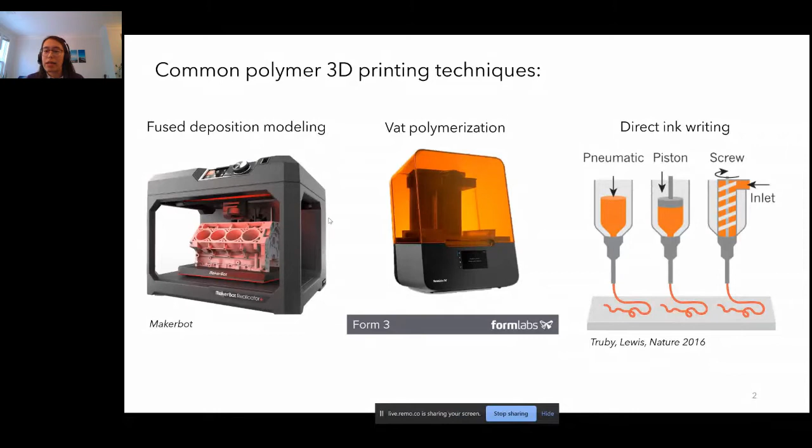So fused deposition modeling, or FDM, is a nice technique for consumers but it is limited to thermoplastics. So the polymer space can be split into thermoplastics, where you can heat them up and cool them down and still maintain the same properties. So things like ABS, PLA, polycarbonate, those are thermoplastics. The other segment of polymers is thermosets. So those have irreversible bonds. You cannot heat those up and cool them down and reform them. So things like epoxies and polyurethanes and silicones.

So the way that fused deposition modeling works is you have this polymer filament that has to be a thermoplastic because you're feeding it through a heated nozzle to make it formable, and then you write out the continuous filament onto a substrate and build up your part layer by layer. So because it's limited to thermoplastics, we need other techniques to fill out that material space and make thermosets printable.

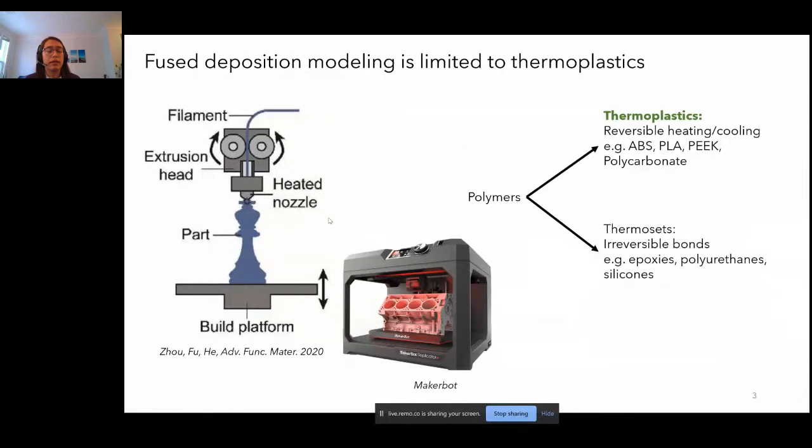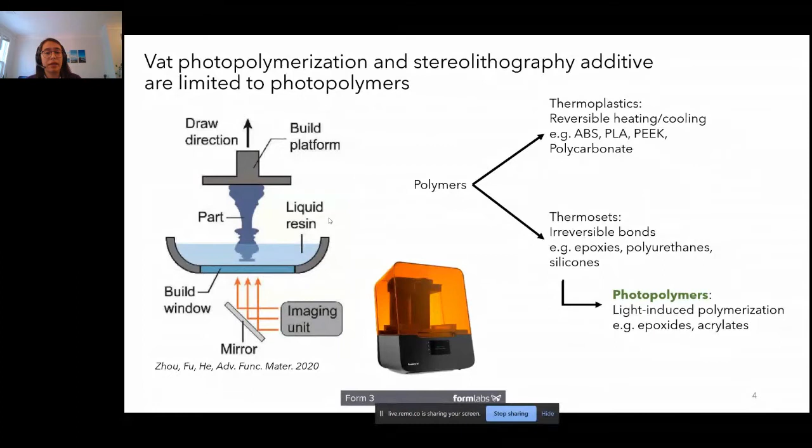So one of the ways you can print those is using vat photopolymerization or stereolithography additive manufacturing. So the way this works is you have a vat that is full of a photopolymer resin. So that means that when you shine a light on it of a certain wavelength, that'll cure it and turn it into a solid. So you submerge your stage into that bath and write out your part layer by layer again. So that takes care of photopolymers, things like epoxides and acrylates, which are a subset of thermosets. But we're still missing a lot of the thermoset space, so we need another technique, which is direct ink writing.

So the way that direct ink writing works is you have a reservoir that's full of your ink, and you extrude it through a nozzle and write out continuous filaments onto a substrate. And you can use a variety of extrusion methods. You could use pneumatic extrusion, so you have an air pressure that is pushing this fluid out of the nozzle. You could use a piston, you could use a screw. And then there are a variety of curing techniques. So once your part is written out onto the substrate, you can cure it using a variety of techniques.

If it's something like alginate, then you could submerge your part into a calcium bath for ionic cross-linking. If you have certain biopolymers, then you could use enzymatic cross-linking to turn that part into a solid. You could, again, use UV radiation. So all these photopolymers are then going to be printable using direct ink writing. And then there's thermal curing. So if you have something like an epoxy, you could write out your part and then heat it up to cure it.

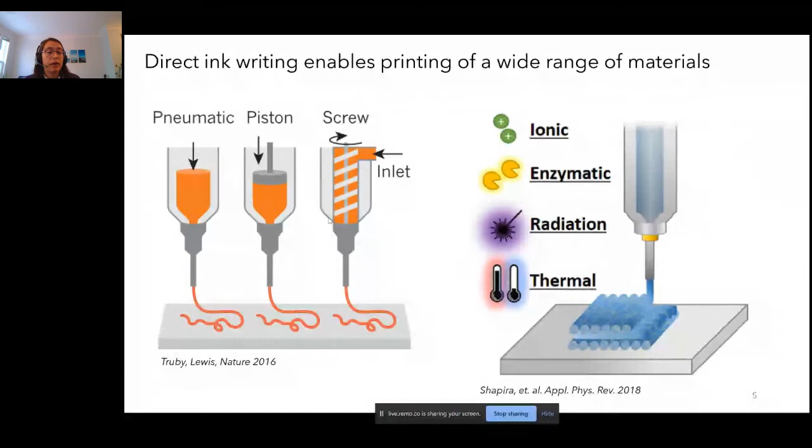So because you have this big range of curing techniques that are available to you, direct ink writing really opens up the material space to include a lot of those thermosets, as well as some other types of materials. You can print ceramic slurries and ceramic matrix composites using this technique because you have that variety of curing techniques. So people have been able to print things like rubber, ceramic matrix composites, polymer matrix composites, and hydrogels using direct ink writing.

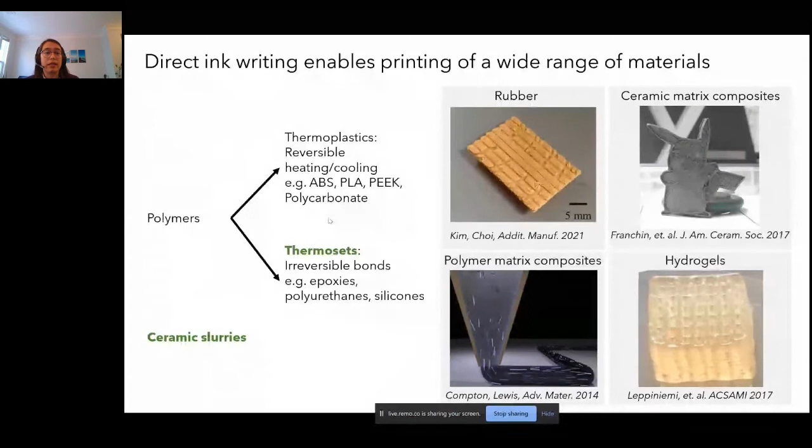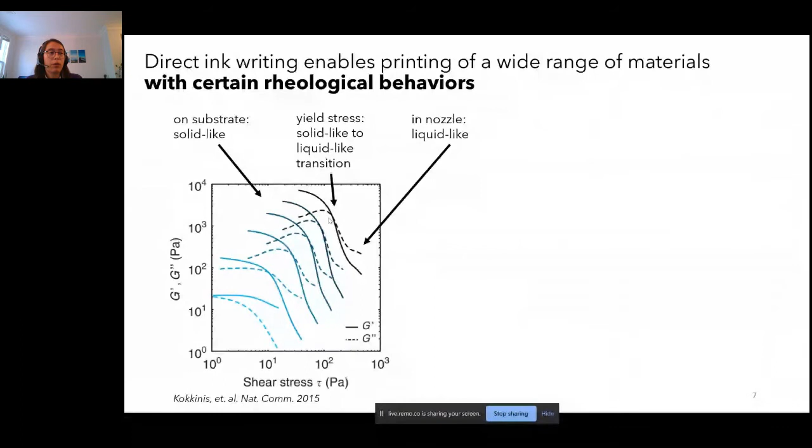Inside of the nozzle, we're going to be at high shear stresses, and you can see that G double prime is greater than G prime, so this material is going to behave like a liquid. And then in between that solid-like to liquid-like transition, there is a yield stress. So that's the stress at which this material stops behaving like an elastic solid, starts to behave like a liquid. So that yield stress needs to be high enough that the material won't just collapse under its own weight. It won't just flow onto the substrate if you bump the stage or move the stage around.

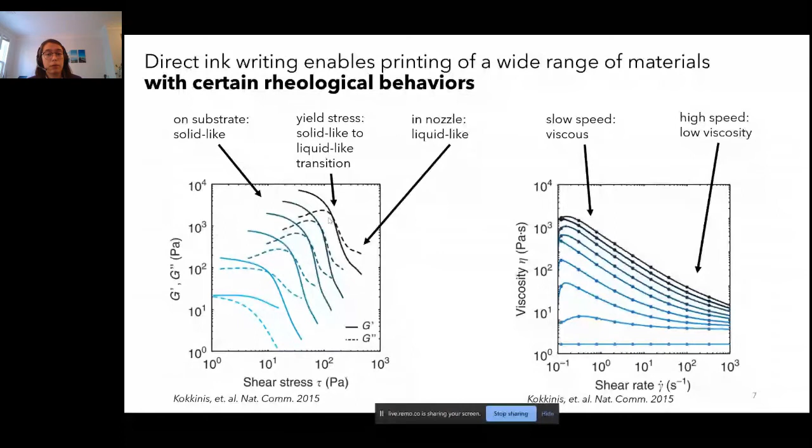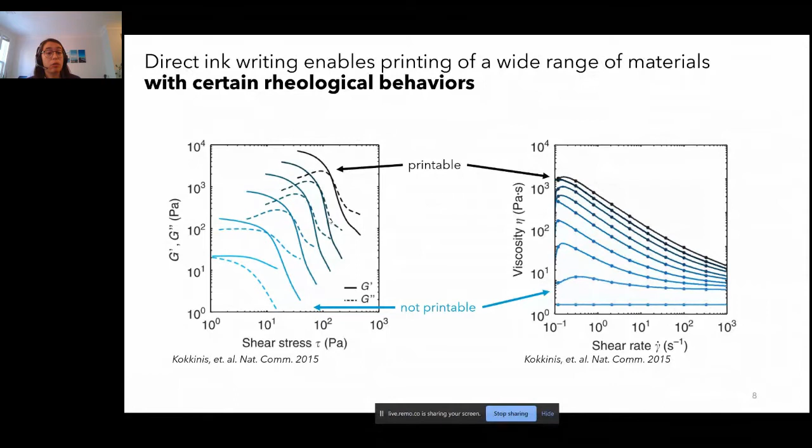So among these inks that are plotted here, at the top of the plot where we have these dark lines, those inks are going to be printable because they have a high enough yield stress that they will not just collapse under their own weight. However, at the low end of this plot, and these light blue inks, these are not viscous enough, they're not shear thinning enough, they don't have a high enough yield stress to be printable using direct ink writing. So that's where embedded 3D printing really becomes useful.

So the way that this works is you have a print bath that is full of a support fluid. Usually that fluid will have a yield stress and it'll be shear thinning just like those materials that I talked about in the last slide. So things like carbopol hydrogels or laponite hydrogels. Those will be good support baths. So you embed your nozzle into that bath and then write out continuous filaments for embedded direct ink writing, or you could print out droplets for embedded droplet printing.

So because these materials have a yield stress, they'll behave like a liquid when the nozzle is moving through them, and that'll allow the nozzles to move. But they'll behave like a solid after the nozzle has left, so they'll hold the form of whatever you printed. So this means that we can expand the available material space into low viscosity materials, and we can print thin-walled structures and delicate structures because we don't have to worry as much about the properties of the ink when you have that extra support available to you.

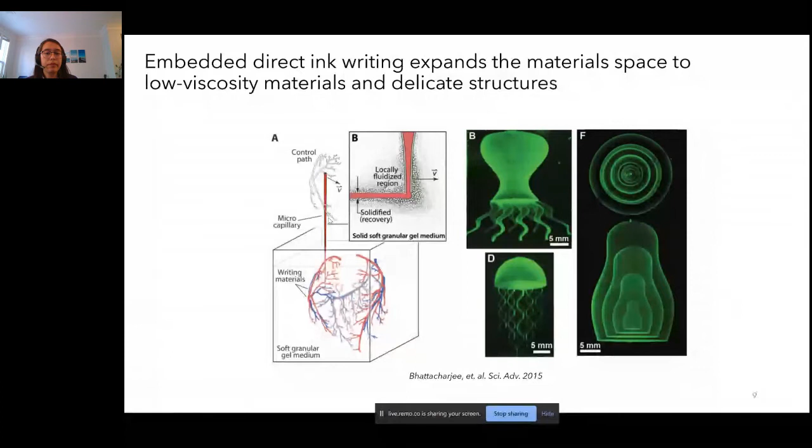So after you're done printing, you can remove these parts from the bath either by scooping them out or using dissolution in a buffer. So what this means is those blue inks, those low viscosity inks, are now going to be printable as long as we use a support bath.

So people have been able to print a wide variety of materials using this technique before, and it's been particularly useful for bioprinting. So you might have seen this paper a couple of years ago where they printed a heart, which actually included human heart cells, as well as some extracellular matrix. So you can print these cellularized constructs and actually use the bath to support the growth of that construct by introducing nutrients that'll feed the cells and allow the cells to proliferate.

People have also been able to print cell-only inks. So instead of having all these biopolymers available that'll scaffold the ink, they can print just cells, and those cells have been able to grow and develop tissues. And then you can also print functional materials. So things like electrically conductive hydrogels, things that are at a low viscosity, where you've already tailored your ink to a certain functional property like electrical conductivity. You can still print that ink by using a support bath because that support bath takes care of the rheology aspect.

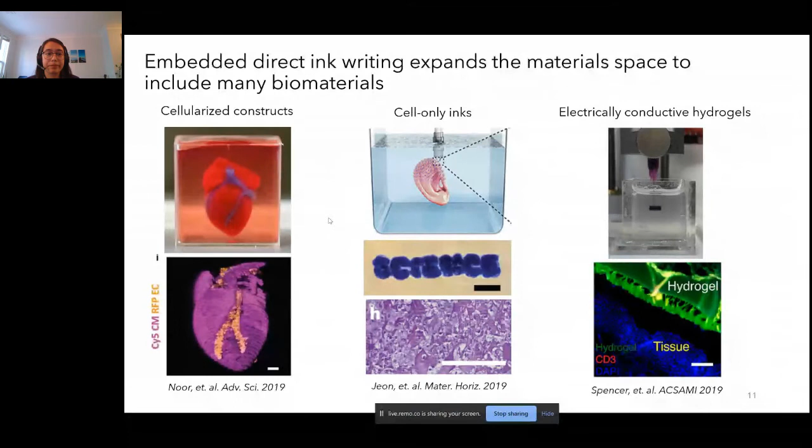So what I want to talk about in this talk is how you choose a support bath for embedded 3D printing. Usually you already have an ink in mind that is going to support your cells or serve some functional purpose. And so how do you choose a bath that is appropriate for that ink? And there are two considerations that you need to take into account. There's rheology and there's surface tension.

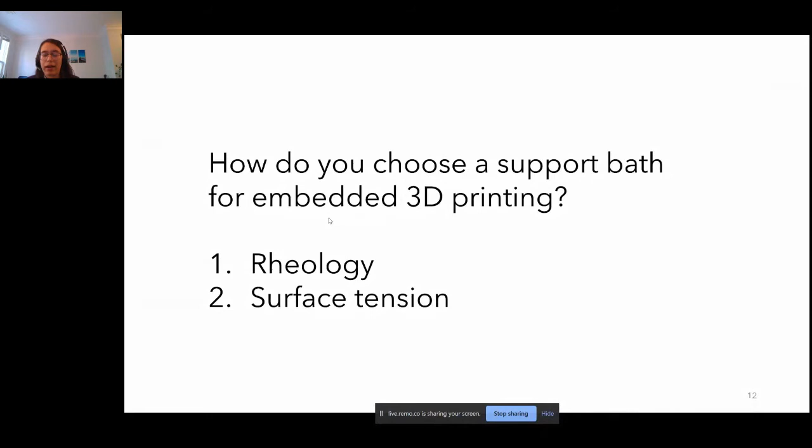So in this talk, I'm going to talk about model materials, which are relevant to bioprinting, but have certain rheological properties that are going to tell us about how the rheology is important. So I'm going to talk about how defects can occur in individual filaments in embedded 3D printing. So this is a simulated filament. You can see that blue column is the ink that's inside of the nozzle, and you have a filament that's coming out of the nozzle.

If you look at the cross section of that filament, it's not circular like the nozzle is. It actually has a sort of fin shape, so it narrows towards the top and towards a point. So I'm going to express that cross section in terms of the aspect ratio, the height over width. I'm also going to look at the length of these filaments. So if I ask the printer for a 10 millimeter filament, I want a 10 millimeter filament.

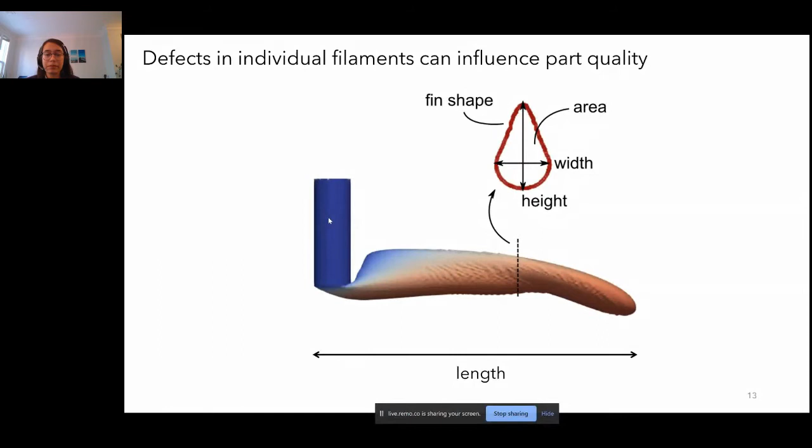Oftentimes, if there are defects, these filaments will end up a little shorter than you intended them to be, and that's going to cause a lot of problems in terms of the shape fidelity of the part. So we're looking for a length that's exactly as long as we asked for. We used two methods to identify these sources of defects. We used simulations and experiments.

So these simulations were done in OpenFOAM, which is a computational fluid dynamics solver. So we imposed a pressure of ink onto a static nozzle, and then had a moving bath moving past it, and so that would extrude a single filament. We also used in situ imaging experiments. So again, we have a static nozzle and a moving bath, but this time we have a camera looking at the tip of the nozzle so that we can see what's happening as we're printing.

And then once the print is over, we can remove the nozzle and go back and take images of our print. So for these experiments, we printed straight lines where we looked at the lines head-on to identify their cross-sectional shape and printed them out from the side to look at their lengths. So first, let's talk about how rheology influences filament defects. In this section, we're going to have no surface tension, and our ink speeds will be set equal to the stage speeds.

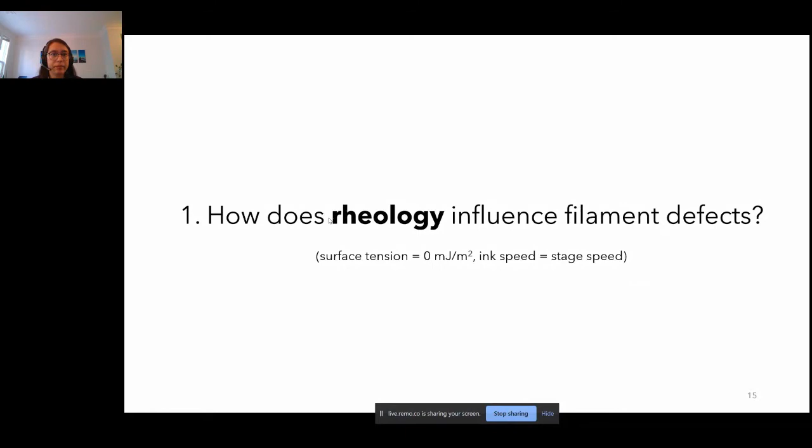So I'm going to investigate a variety of different rheological behaviors. So one type of material that has been printed is the Newtonian material. So usually in these papers where they're using Newtonian materials, they'll have some sort of stabilizer at the interface. So they'll be printing oil into water, but they'll have a particle that stabilizes the interface so that the material doesn't break up into droplets.

In our simulation, we use Newtonian fluids in order to identify what is the effect of viscous dissipation on this process. We don't want to have to worry about yielding or elasticity or anything else, just viscous dissipation. We also simulated Herschel-Bulkley fluids. So these are the fluids that are like the fluids that I talked about in the beginning, where they're going to behave like a solid up until a yield stress, at which point they're going to behave like a shear thinning liquid.

So for these simulated fluids, all of the behavior in the shear thinning region is going to be the same. These are all going to have the same viscosity above yield. But below yield, they have different viscosities, which I call the plateau viscosity. So that is going to extract just the effect of what the unyielded properties of the materials do to the structure of the filament.

And then finally, for our experimental fluids, we're going to look at a variety of fluids, but generally they follow the same pattern, where they're shear thinning, but as you increase the amount of rheological modifier in that material, you're going to shift this entire shear thinning curve upwards, so increase its viscosity. So what I'm showing you here is laponite and water. So laponite is a layered silicate, and it'll form these structures that will give it a yield stress and give it shear thinning properties.

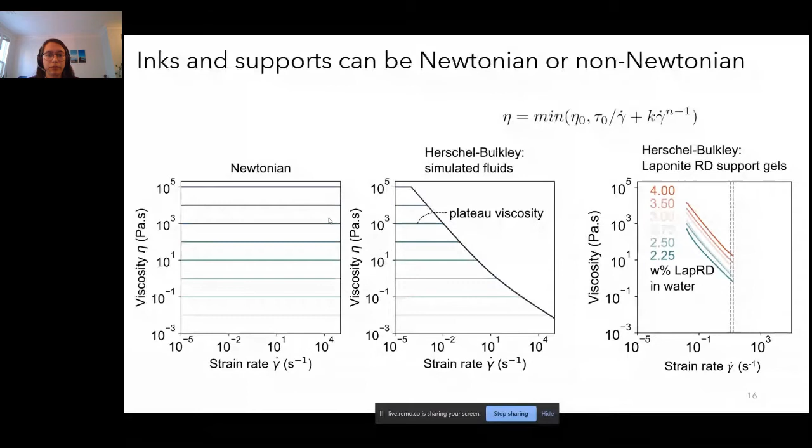We're also going to be looking at a circular shape because if there's any sort of sharp edges on these filaments, that could lead to porosity in the final part, or it could lead to surface roughness, both of which would be problematic. So for these Newtonian fluids, remember this viscosity is going to be constant with strain rate.

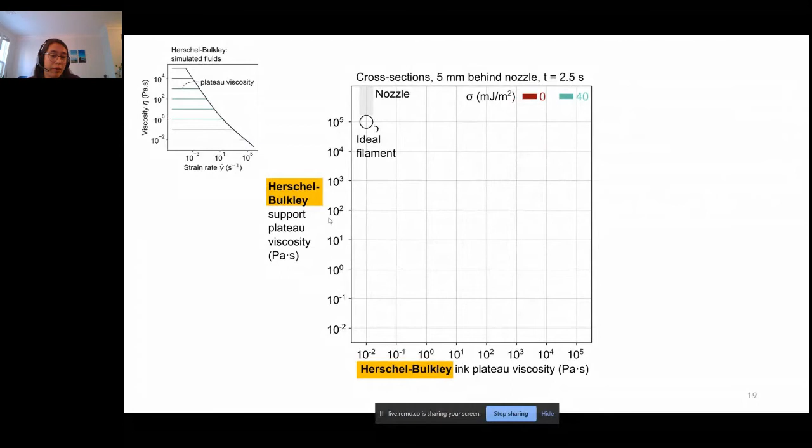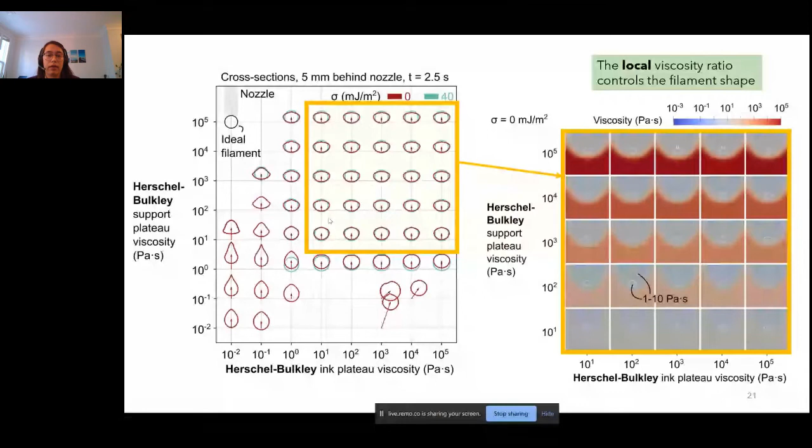So now let's look at our experimental fluids. So here, our local viscosities are going to change, and they're going to increase as we increase the concentration of Laponite in the material. So here we're printing Laponite water into Laponite water, but our ink has a little bit of dye, so we can see contrast.

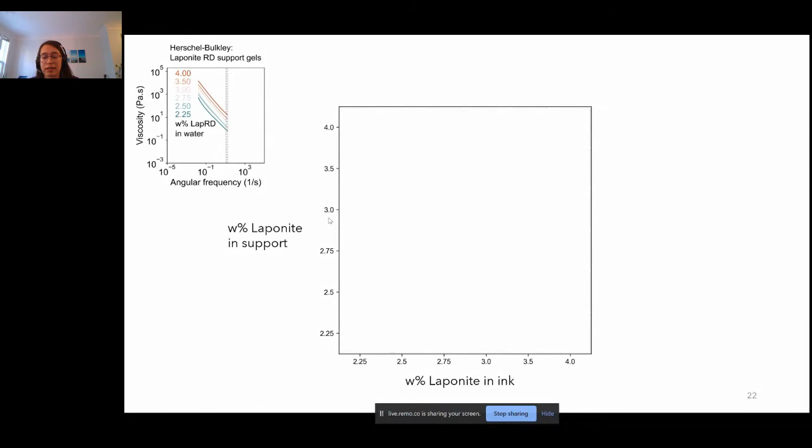So if you look at the bottom right corner of this plot, you can see that as we go to high ink viscosities and low support viscosities, we get circular filaments. If we go towards the top left corner of this plot, where we have low ink viscosities and high support viscosities, we get very tall and narrow filaments. And these filaments also get sort of sharp edges at the top and at the bottom of the sides.

So in order to compare this to the simulations, remember the simulations taught us that the local viscosity ratio controls the filament shape. So let's identify the local viscosity ratio. You can get that by taking your print speeds, so the speed of ink moving through the nozzle and the speed of the stage moving underneath the nozzle. Divide that by the dimensions of the nozzle, and that'll give you your shear rate. Plug that in, you can get your local viscosity.

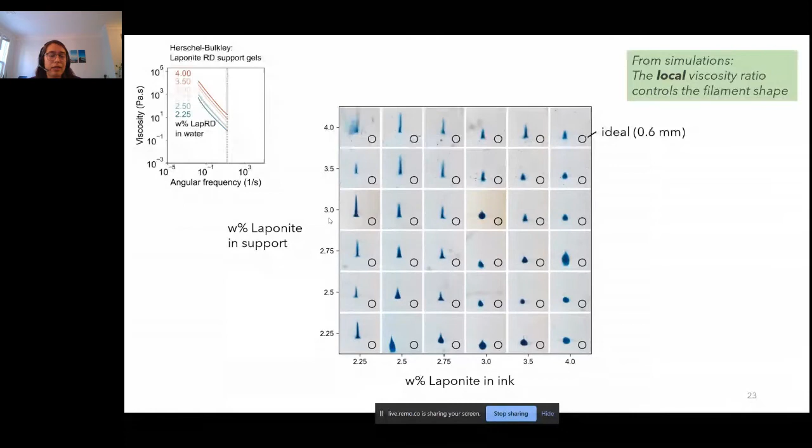So in the top left corner, you can see those dotted lines. Those are our local shear rates. So that's how we get our local viscosity. So here, what you can see is that as you increase your viscosity ratio, you decrease the cross-section height over width. That occurs in both our simulations and our experiments. And there's pretty good agreement as we go to higher viscosity ratios.

So what this tells us is that if the support is more viscous than the ink, it just ends up squeezing the filament vertically and creating these very tall and narrow aspect ratios. Another thing that we can note here is that you need to go to a viscosity ratio of greater than 1 in order to get a circular cross-section. So the ink needs to be a little bit more viscous than the support to get to this ideal circle.

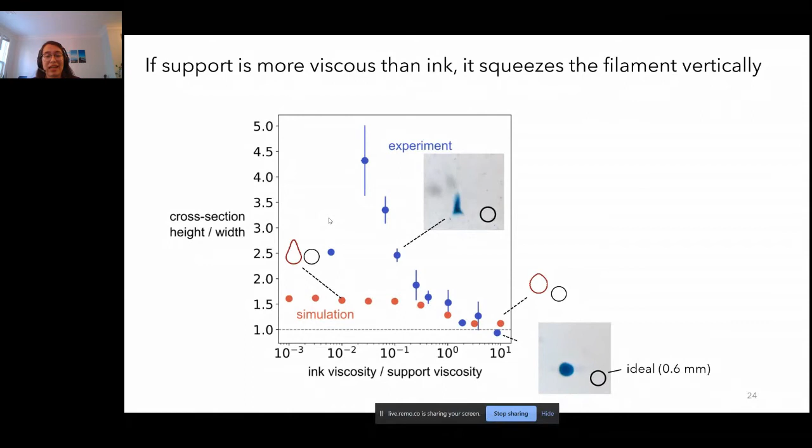Okay, next let's look at how surface tension influences filament defects. So we're going to introduce some oil-based inks that we're going to print into our water-based support.

So here we're simulating some filaments that are being extruded into a bath at a surface tension of 40 millijoules per meter squared, which is about what you would expect for oil and water. So you can see again, as you look down the diagonals at high viscosities, the viscosity ratio is what is controlling the filament shape here. But as you start to go towards lower support viscosities, we see a little bit of deviation, and we see filaments breaking up into droplets or just clinging to the nozzle as a singular droplet.

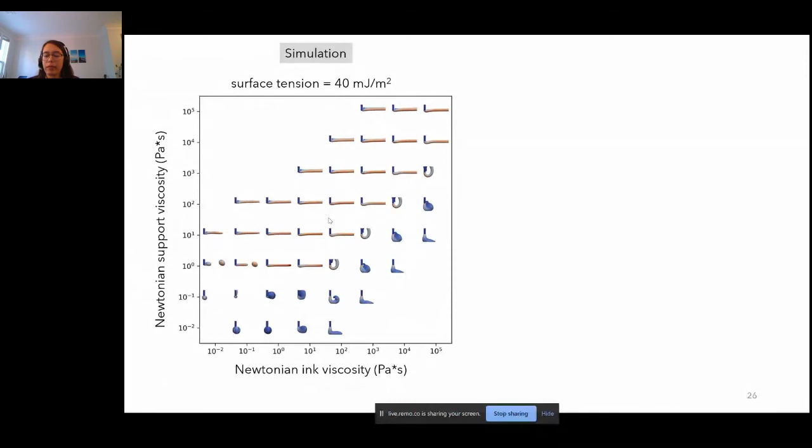If we compare that to our experiments, here, these experiments are covering a smaller region of this viscosity map in terms of the local viscosities, but you can see we get the same pattern, where at low support viscosities, we get filaments that break up into droplets or start to go towards a spherical shape. And if the ink viscosity is low, you get filaments that break up into droplets. If the ink viscosity is high, you get a full filament that then shrinks back towards a spherical shape.

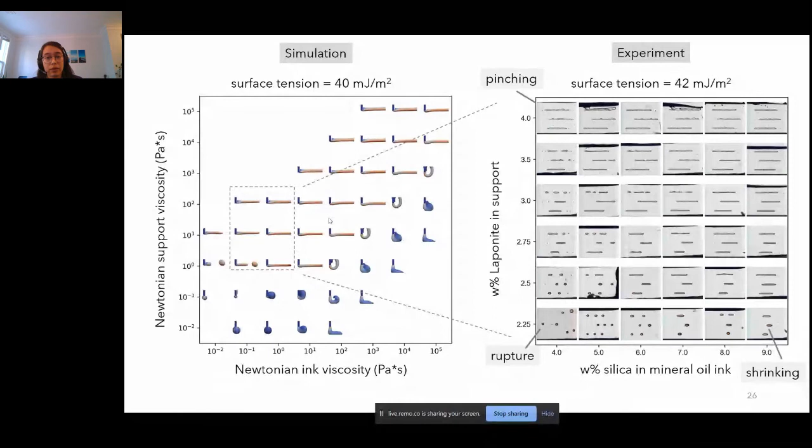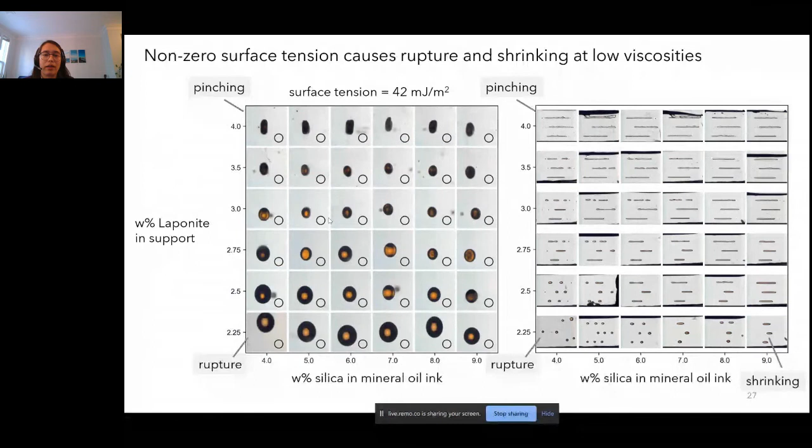If we go to high support viscosities, we suppress that breakup and we still get continuous filaments. However, they are pinched. So if you look at the cross-section of these filaments, they're a little bit taller and narrower than the circular cross-section that we're looking for. So that pinching is the same sort of pinching that we saw with our water-based inks, where we have tall and narrow filaments that occur at high support viscosities.

So in order to map these oil-based inks onto some sort of constitutive relationship that tells us how we can balance all of our properties, we can use the capillary number. So that's the speed of the ink times the viscosity of the support divided by the surface tension. So that capillary number is telling us how we need to balance the viscous dissipation in this system against surface tension.

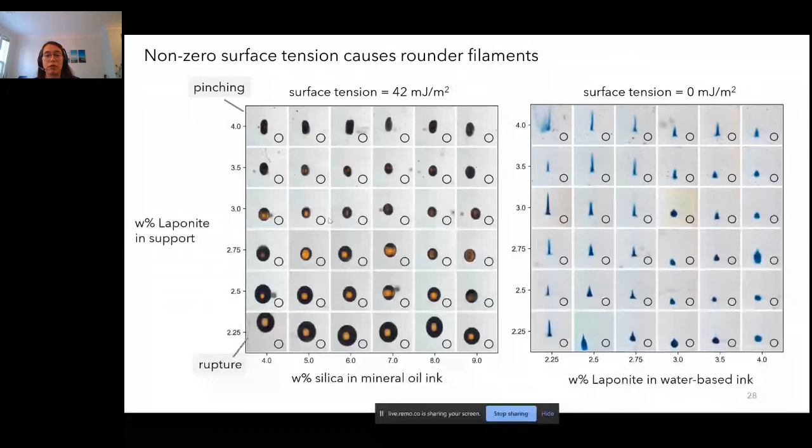So you get an osmotic pressure that drives water from the support into the ink and causes the filament to swell. And that's going to cause a lot of problems because as you're printing your part, the filaments that you've already printed are going to be swelling, and you're going to be printing new filament that is smaller. And so you get a lot of geometric inaccuracies, and you could end up with problems with fusion. So suppressing that swelling is really important.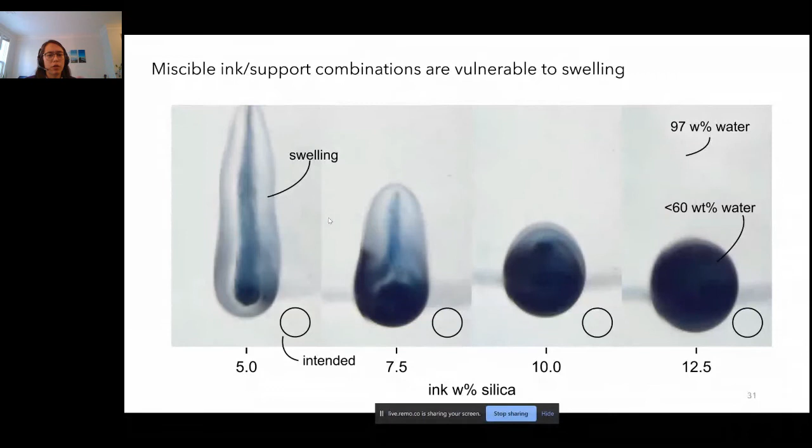So to summarize, embedded 3D printing, or embedded direct ink writing, is a really useful tool for printing low viscosity materials, and really has a lot of promise in the bioprinting space because bioprinted materials or biomaterials tend to be low viscosity and have specific properties that you're looking for when you're printing cells and things like that. If you're choosing a support for embedded 3D printing, you need to make sure your local support viscosity is slightly lower than your local ink viscosity near the filament.

And finally, a non-zero surface tension can be useful if you want to produce rounder filaments and suppress surface roughness and swelling, but you need to choose a capillary number that is high enough to suppress shrinkage. So you can use your support viscosity and you can use your surface tension to make sure that you don't get filaments rupturing or shrinking back towards a spherical shape.